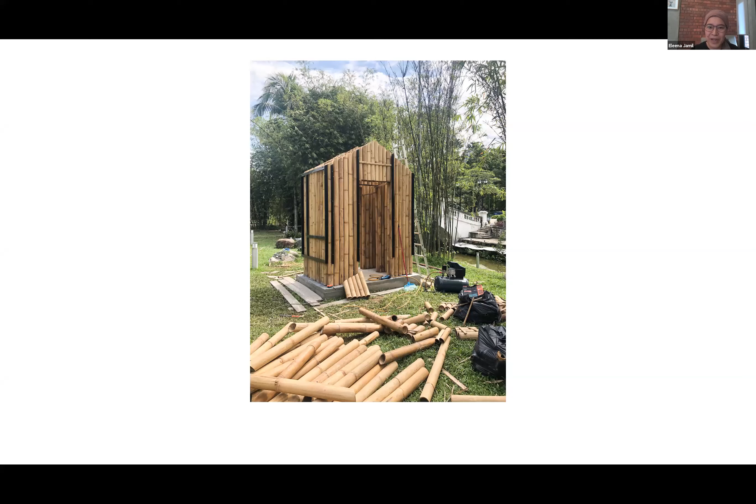Bamboo is a building material that is grown by nature. There is no other building material in the world where you could just harvest it, treat it, and use it immediately as a building material. Therefore, it is a great sustainable material, as the embodied energy is low, especially if you use it locally. Materials like timber, steel, and concrete consume a lot of energy in their production process to make them usable as a construction material, but not bamboo.

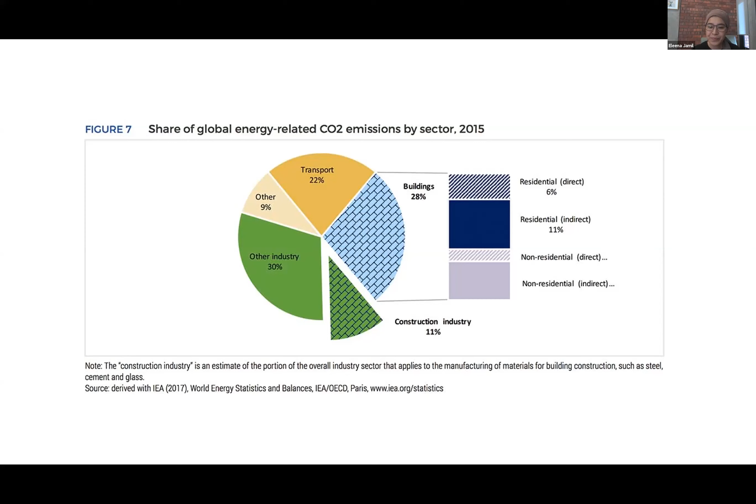This is important because the construction industry forms one of the largest consumers of resources and energy, and has also been recognized as being responsible for a huge proportion of waste and CO2 emissions. For example, buildings and construction now account for 39% of energy-related carbon emissions, 28% coming from buildings and 11% coming from the construction industry. So the impact of what we do as architects, developers, and contractors on carbon emissions is really huge.

What's happening now is that the extreme climate change we are experiencing means there is a need to shift in the way we build our environment. I believe that using more renewable and biodegradable resources like bamboo will really help in reducing emissions and lessening the production of waste we are experiencing right now. So as an architect, I feel that bamboo offers architects and designers the opportunity to build more sustainably, as part of our civic duty to overcome the effects of global warming and excessive waste.

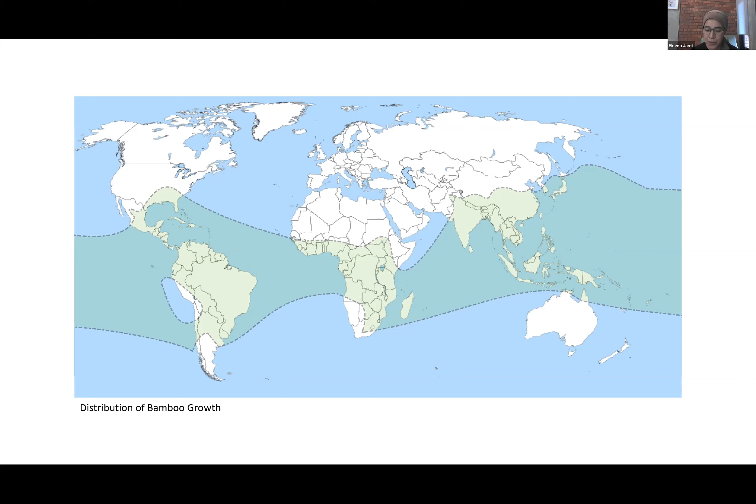Bamboo thrives in many parts of the world, so there is no shortage of the material or of places to cultivate it. For example, you get Guadua angustifolia, which thrives in South America. In Southeast Asia, you get Dendrocalamus asper and Bambusa blumeana, very, very strong bamboo. And in China, you get Moso bamboo.

So bamboo, like most natural material, is highly biodegradable. Working with bamboo means working within the limits of nature, in the capacity of Earth's ecosystems and the ability to produce natural resources. They form a renewable resource and are harmless when they are disposed of, disintegrating over time.

Bamboo has the ability to sequester large amounts of carbon, especially in a well-managed plantation where harvesting is done properly and regularly. Bamboo plantations are actually easy to manage because it grows very quickly compared to timber. It's self-replenishing, so new plantings are not required after harvest because the root systems are still intact.

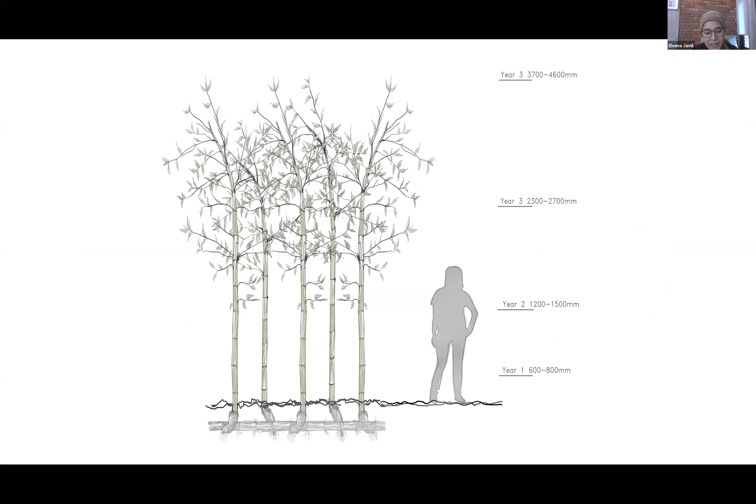The other important thing about bamboo is that it grows remarkably quickly. It grows to full mass within 6 months, and it's suitable for structural use within 3 to 5 years. Compare that to hardwood trees, which take around 30 to 50 years or even longer until harvest time. So investing in bamboo for building materials involves a much smaller period of return on investment compared to timber.

Bamboo is also the ideal material in this concept of circular economy. So what is circular economy? It asks us to consider the entire life cycle of everything we produce, from cradle to grave, or from cradle to cradle. Here on your screen is the circular economy diagram.

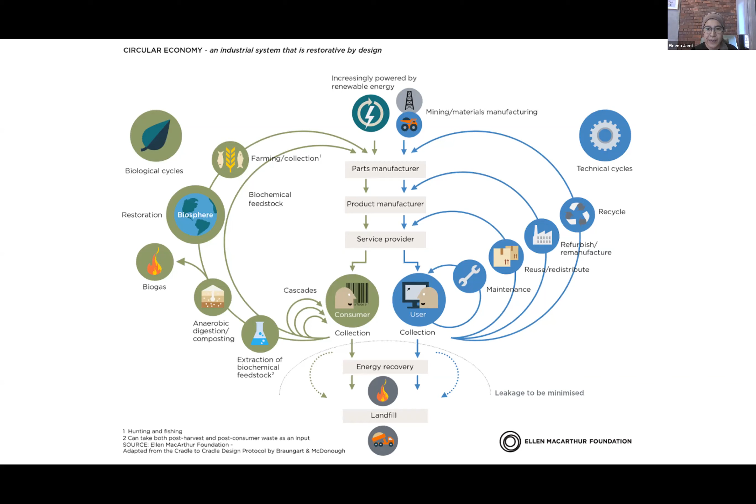On the left-hand side, you get products which are 100% renewable, biodegradable after use. They can be either recycled or regrown by nature itself. On the right-hand side, you get non-renewable industrial material whose finite stocks need to be secured by high-level recycling. So bamboo would work in this left-hand side circular economy diagram perfectly.

Bamboo is often called the green steel for its remarkable strength. The benefits of using bamboo in construction extends to the fact that it has high tensile strength, which is parallel to the fibers that run longitudinally along its length, compared to most soft and hardwoods.

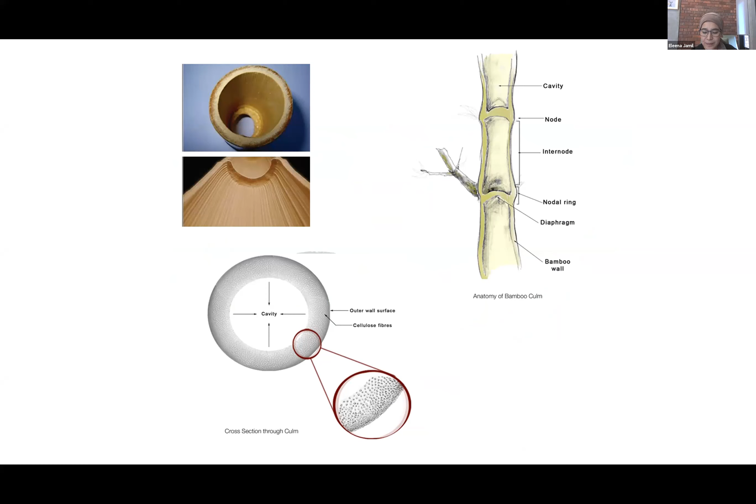It's a very efficient building material because of its hollowness. This means that it's lightweight and has high levels of stiffness based on its strength to weight ratio. So what you get when building with bamboo is lightweight construction, which reduces perhaps the loads on foundations.

But bamboo has its problems, and one of the greatest concerns about using bamboo among many people is its durability. Being a natural material, it will decay. It's biodegradable, and it is susceptible to insect attacks.

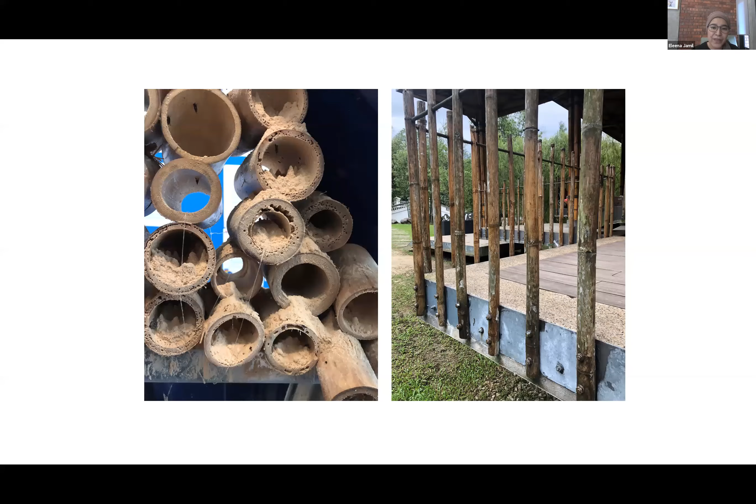In the image on the left here, you see an infestation by powder post beetle, and on the right is a fungus attack. But there are ways to overcome this by treating bamboo, either naturally using traditional methods or chemical methods.

The object of treating bamboo is to remove the starch in the bamboo. The starch is attractive to insects, so bamboo with a high starch content would be very attractive to insects.

With traditional methods, you get various approaches. For example, after harvesting, you just leave it in a river, soaking it in running water. Sometimes you could actually tie them up to make rafts so they can be transported to a place where they are required. By the time these bamboo rafts arrive at their destination, the starch would have leached into the water.

And there are also other traditional methods, such as steeping, which is just leaving bamboo out to dry vertically, and smoking is also another good traditional method.

Chemical methods, of course, use chemicals to treat timber. In Malaysia, we use a lot of the open tank method, where there are big tanks, either in concrete or steel, where bamboo is immersed in a chemical solution, usually a boron and borax mixture, for up to 3 days or sometimes a week.

Or you can just put it vertically in a drum with the steeping solution. And there's this more effective method, the modified Boucherie method, where pressure is used to push the chemical into the bamboo capillaries so that the starch comes out on the other end.

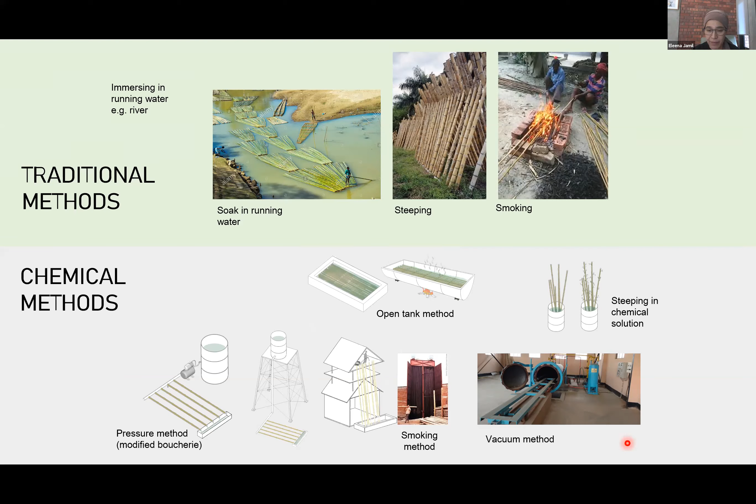In Japan, you find the smoking method, where large kilns are built to smoke bamboo. And then there's the vacuum method, which is used for treating timber and can also be used to treat bamboo.

Natural material like bamboo has always been used to build the environment in the form of vernacular structures in communities where the plant thrives, obviously. But we have lost that way of building. This is because of the Industrial Revolution in the 18th and 19th century, which brought a shift from using renewable building materials to non-renewable materials that are mined, such as iron to make steel, or sand to make glass. So climate change and its devastating effects, and the problem of waste, has led us to think about a more natural way of building.

I think there is a lot to learn from these vernacular structures based on a simple principle: they work and look the way they do because they are built for the climate and site conditions, using what is available around them, designed for the culture and the everyday life of the people living in them. It's the same principle that could enrich contemporary architecture without having to compromise modern aesthetics and technology.

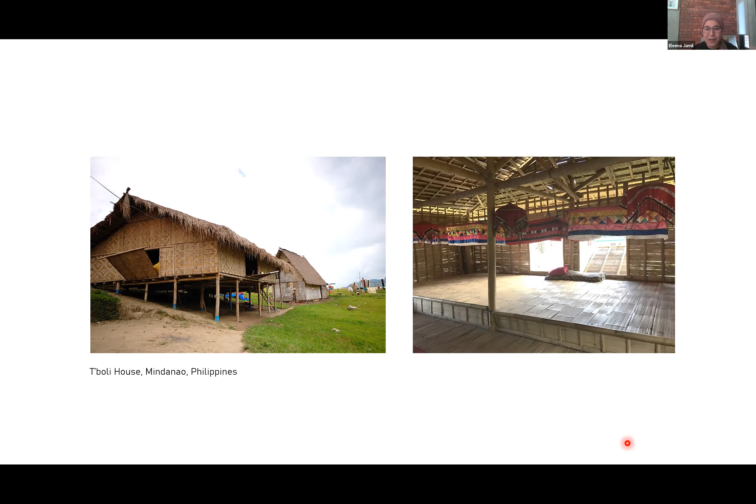So stilt houses are still being built, mainly in rural areas. Here we have the Bahay Kubo, or the Nipa hut, in the Philippines. This particular one is built by the T'boli indigenous tribe in Mindanao, Philippines, where the columns, beams, rafters, walls, and floors are made entirely out of bamboo. They are mainly single volume houses capable of accommodating up to 16 people at a time. I find the window detailing especially interesting, where it's hinged at the bottom, so when the window opening shutter opens up, it becomes a shelf during the day.

Then there are these bamboo houses by the Mru people in the Chittagong Hill Tracts in Bangladesh, which are still around today. The main columns and beams of this house are actually made from timber with their bark removed, while the secondary supporting structures are bamboo. Below the floor deck level, as you can see in the section of the Mru house, props are used which help improve the stability on sloping ground and counteract the lateral sliding that may be caused by mild earthquakes in this region.

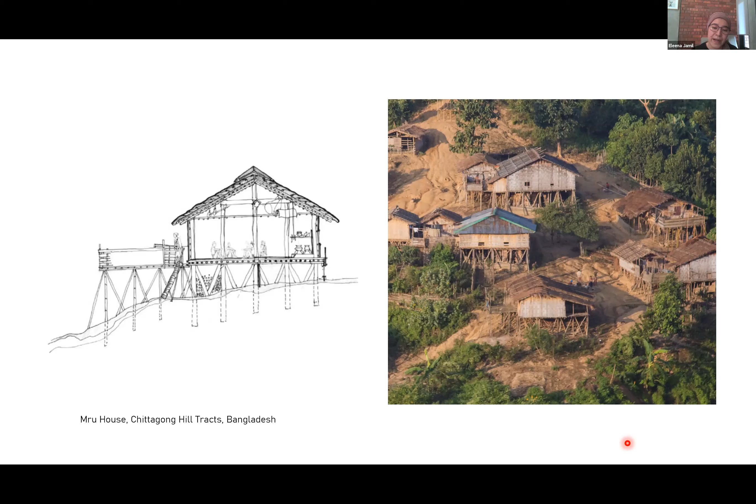So they've been proven to be quite durable during earthquakes in the way that they are designed. The walls of the Mru house are mat-like, woven from bamboo strips 200 mm wide by 50 mm wide. You see the wider strips on the image on the left-hand side; the wider strips are vertical, and this makes sense because it is more effective in expelling rainwater from the surface, keeping it dry. The floor as well, as you can see, is a woven bamboo mat.

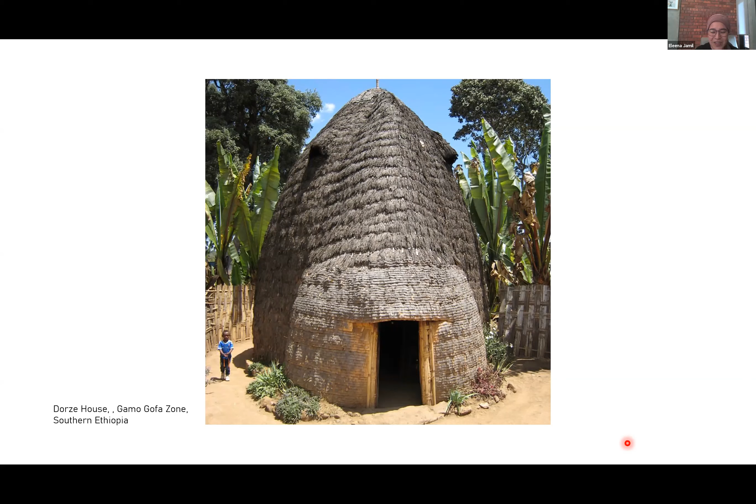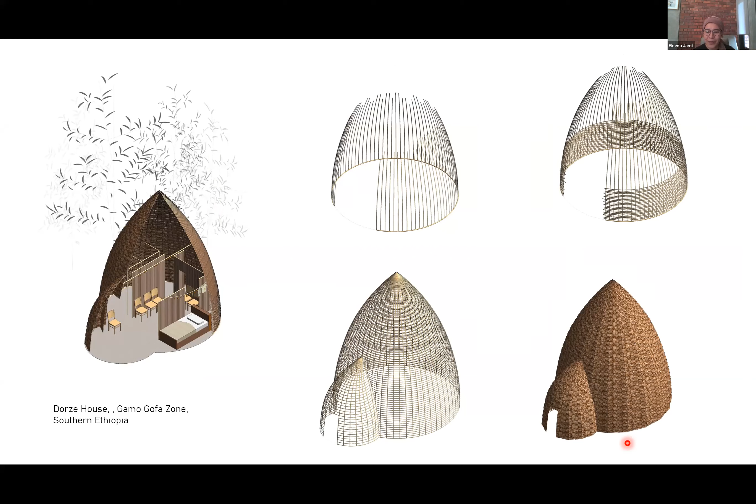So the Dorze house is actually woven like fabric. It consists of bamboo strips with their softer inner lining removed so that they are able to be woven around, like the images shown here, woven to become this interesting conical shape.

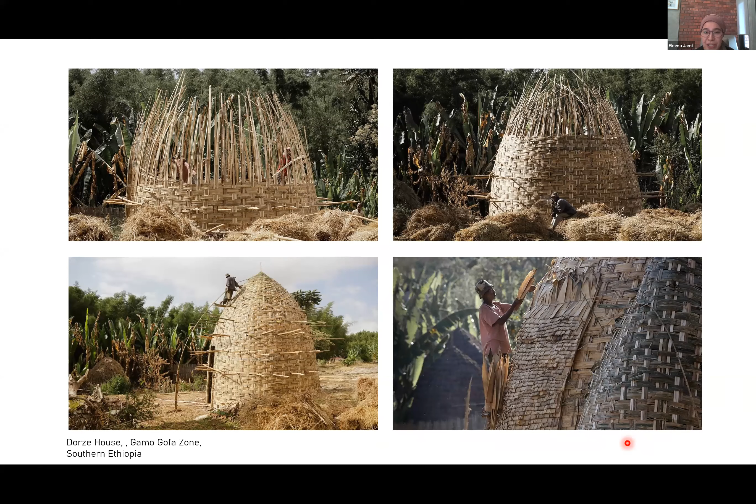To waterproof this house - as you know, bamboo doesn't last very long when exposed to sun and rain - there's an interesting solution. The final layer is a thatch made from bamboo sheaths, which are the protective leaves that protect the nodes of the bamboo culms as they develop. They are a dry, light, leafy material, which are taken off and arranged like a thatch, as you can see in the image on the right, to protect the Dorze house. Research shows that this house, if maintained and built well, can last 40 to 50 years.

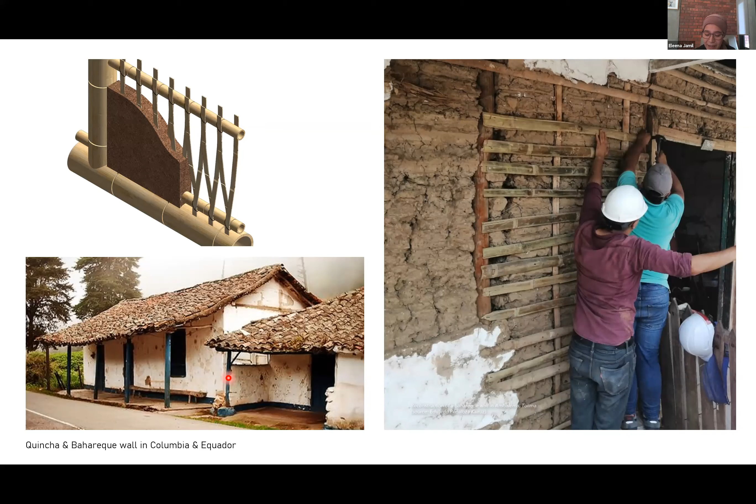Another interesting vernacular bamboo technology is this wattle and daub wall construction. This technique is commonly found in Central America and South America, locally known as the Bahareque or the Quincha system. It's widely used with Guadua angustifolia, because Guadua bamboo grows very well in this part of the world. It consists of a woven frame of bamboo strips, which is then plastered, usually with a mixture of mud and horse dung, though later it changed mainly to clay or concrete. Properly built and frequently maintained, the Bahareque has good structural properties that can resist damage from earthquakes experienced in this part of the world.

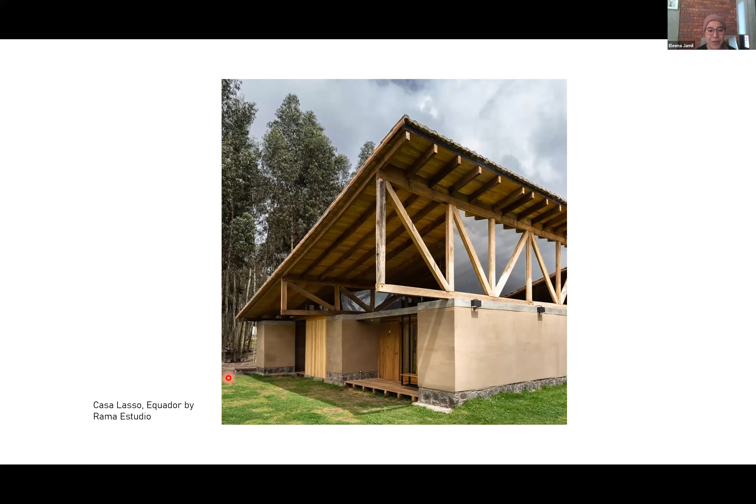So the Bahareque has been used in contemporary architecture. This is a house with a wattle and daub modern construction in a project by Rama Estudio in Ecuador called the Casa Lasso.

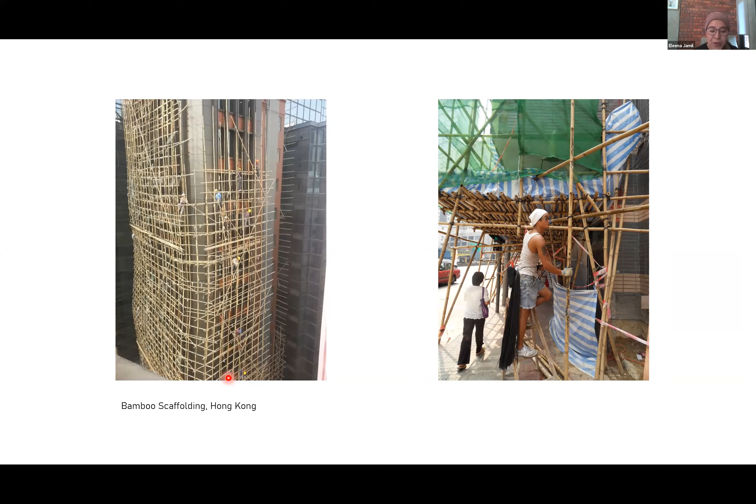Another important vernacular tradition is bamboo scaffolding, which I'm sure everyone has seen in Hong Kong and South China. It goes back hundreds of years, initially used for temporary Cantonese opera theatres and worshipping halls, but now used to create high-rise towers. The scaffolding system is very simple, but makes sense and is easy to create.

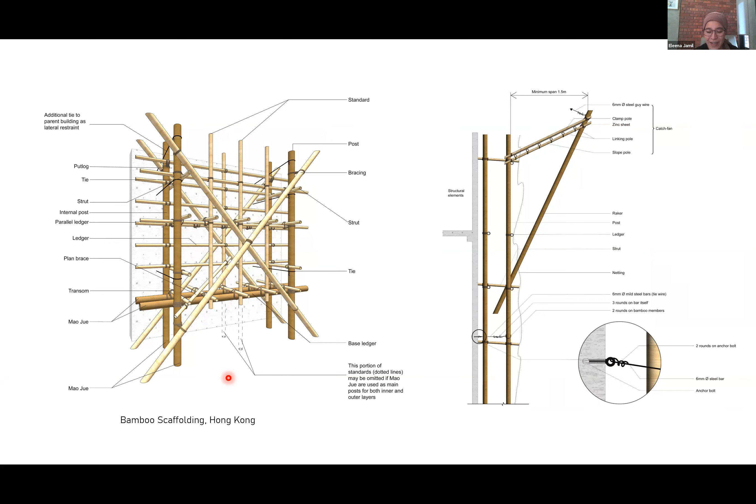It effectively uses ties and anchors to create three-dimensional climbing structures, using local bamboo called Kao Jue and Mao Jue. The Mao Jue is the famous moso bamboo that is grown quite a lot in China and Taiwan.

The most bamboo buildings being built today use vernacular-based methods of construction and jointing. This traditional method usually involves making unique cuts to increase contact surfaces between the culms, and lashings are often used to keep them together. The rigidity of this traditional joint relies heavily on the friction between culms, between lashings and the culms, and the tightness of the lashings.

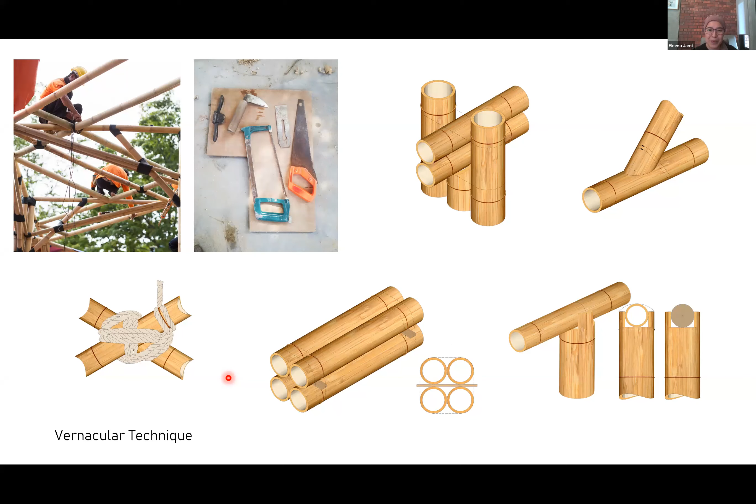This approach produces some of the most elegant connection details and beautiful bamboo buildings, but they are labor intensive and rely heavily on a worker's skill. Nevertheless, it's an important technique to understand in order to develop more modern methods of jointing bamboo.

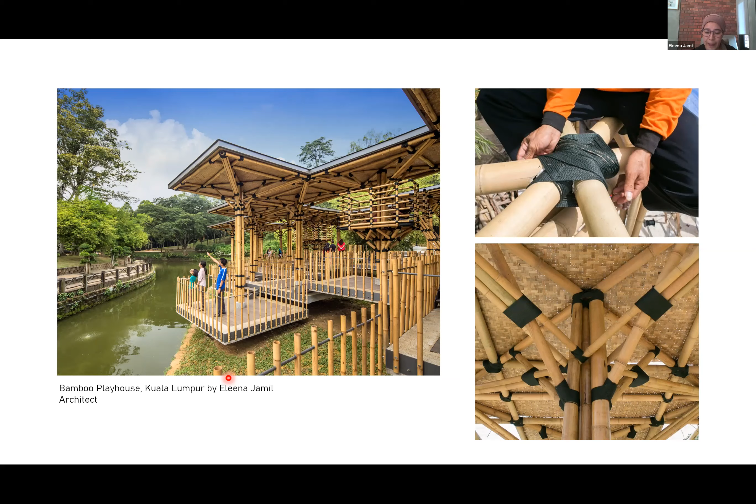We've done a few bamboo projects, mainly built using this traditional jointing method. As you can see in these images, they are cut and fit together, then lashed using strings, and we've also applied resin to the strings so that they don't unravel.

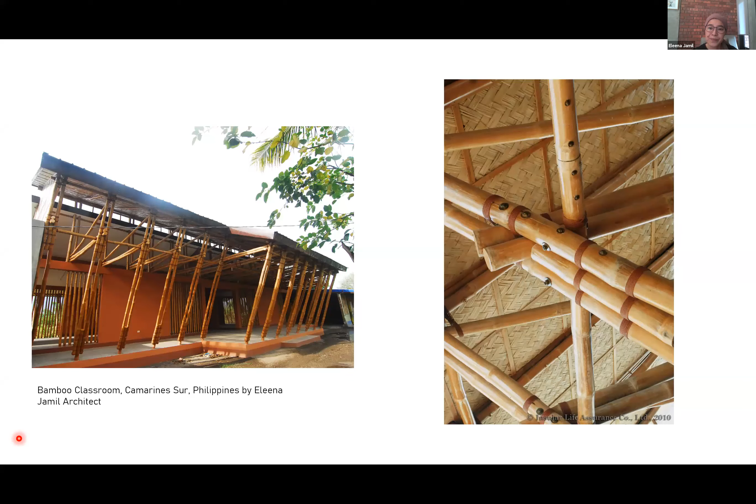Another project of ours is the bamboo classroom in Camarines Sur, Philippines. Again it uses a traditional jointing method, but here we've added nuts and bolts, because this is a wind resilient structure that needs a high degree of rigidity to resist the wind. It's a hybrid between a traditional technique and an intervention involving modern materials.

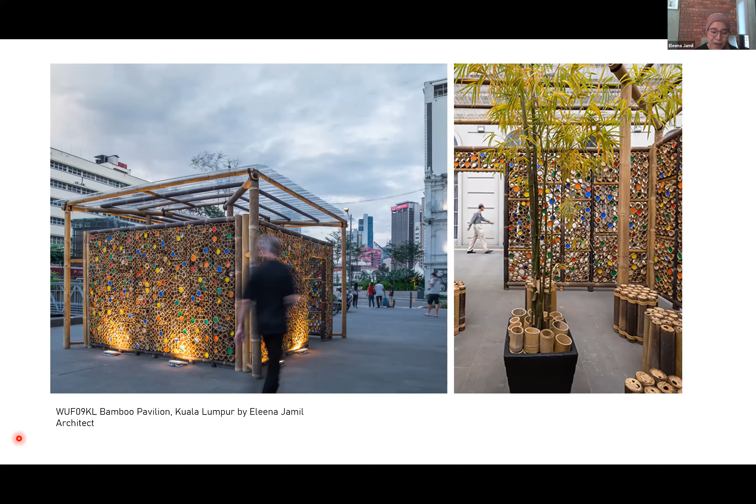You can actually create very modern and contemporary structures using traditional technique. Here, simple lashings are used to put together a pavilion we created for the World Urban Forum in 2018, with simple bamboo rings, some inserted with colors. This was designed for UN Habitat, so the colors reflect the sustainable development goal colors - using a very simple connection technique.

This is another interesting project in the way it is made - the Forest Pavilion by NArchitects, based in Brooklyn, but the building is in Taiwan. This diaphanous curving structure is built using 20mm diameter local bamboo that grows quite a lot in Taiwan - the Makino or Phyllostachys makinoi bamboo.

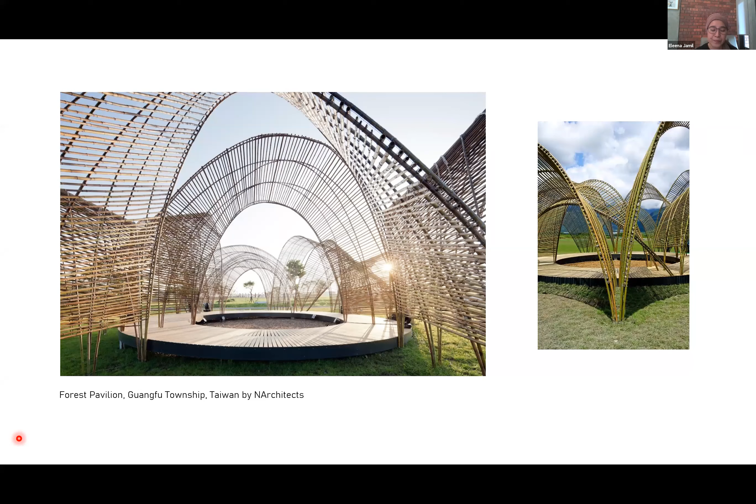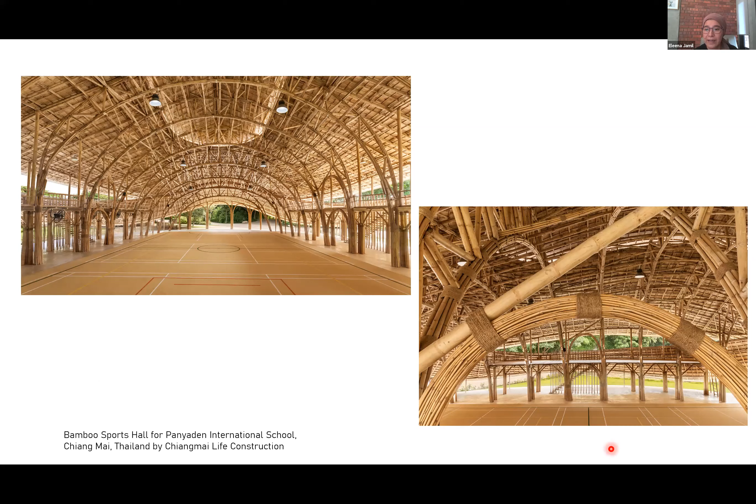Using vernacular methods of construction is capable of producing some of the most amazing bamboo architecture. This is the bamboo sports hall for the Panyaden International School in Chiang Mai by Chiangmai Life Construction, and you can see in the image the traditional techniques used to put it together.

Traditional methods of jointing round bamboo culms involving friction, tight lashings, and pin and socket connections remain a vernacular practice. It is craft-based, custom-made, with the quality and strength of connection dependent largely on the skill and workmanship of the worker rather than precise mechanical calculations. It works remarkably well in small projects or one-off buildings, but applying such practice to large developments can be impractical.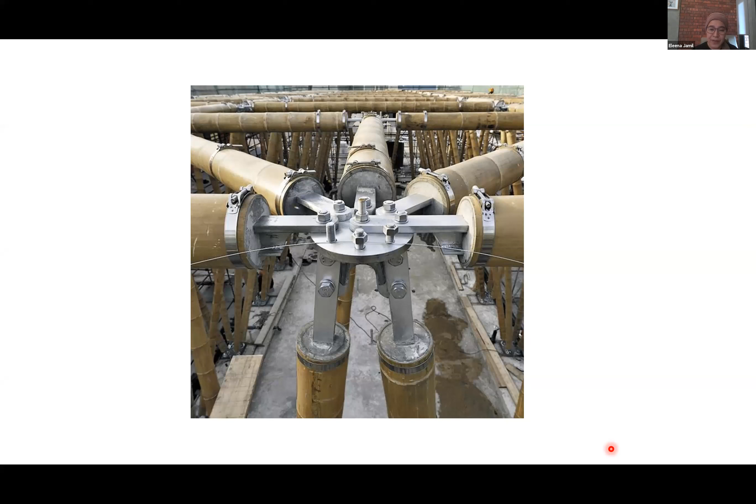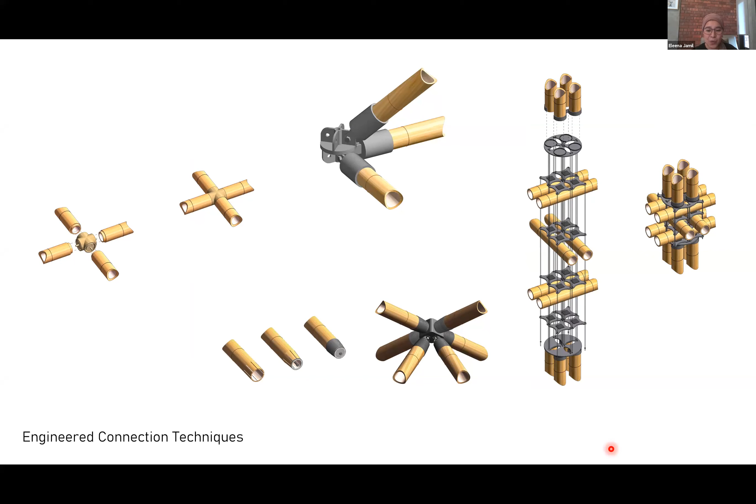For bamboo to be used as a modern building material, it needs to be modernized, industrialized, so that it will allow flexibility, easy and quick assembly, in addition to prefabrication and modularization. There are many examples, lots of research being done on modern connections using different materials such as timber, PVC, metal, sometimes resin. These techniques allow for connecting bamboo in different directions and for grouping bamboos together to become columns and beams. So it's not impossible. A lot of research has been done.

One of the most amazing, perhaps one of the most beautifully detailed industrialized bamboo building methods, is the energy efficient bamboo house by Studio Cardenas. It's developed using dry connections. Here, what they've done is tried to avoid perforating through the bamboo or infilling the bamboo with concrete. Instead, there are lightweight aluminum plates that sandwich or clamp the bamboo together, tightened by nuts and bolts that run through the plates. So the structural integrity of the bamboo is not compromised by drilling, which happens quite a lot in traditional bamboo construction.

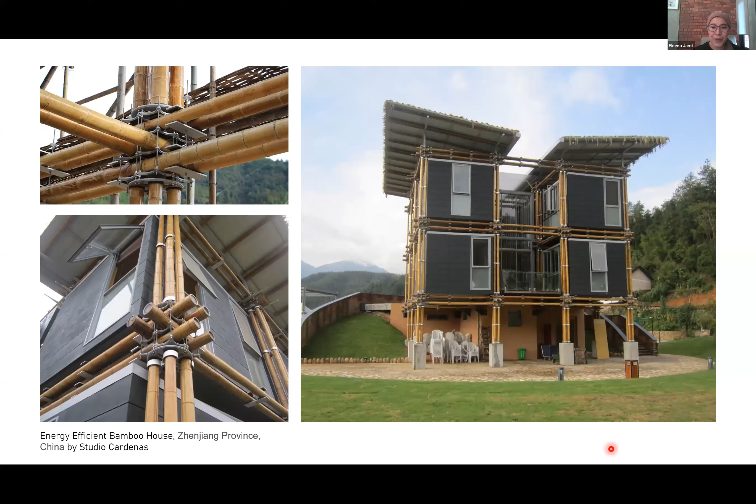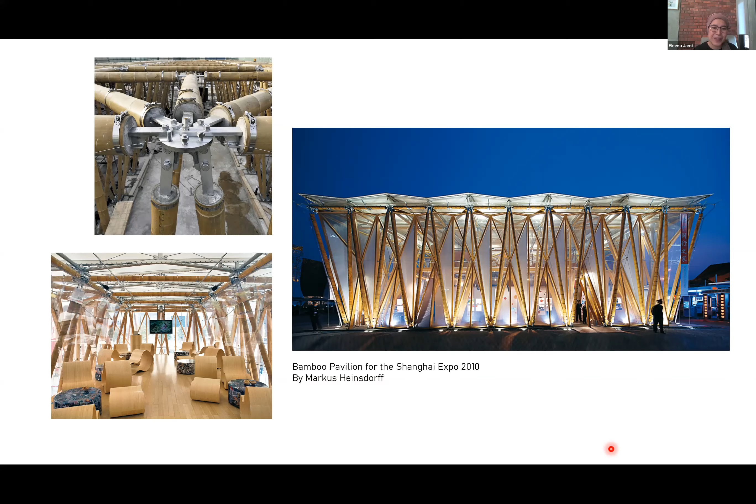This is in China, by the way. Another more high-tech version uses mortar to infill the ends of the bamboo culms, where they've set in a steel connector piece at the end. The steel connector that protrudes out of the bamboo is able to be connected in many different ways. This solves the problem of non-uniformity between the culm dimensions, making the ends of bamboo culms uniform. So this is another interesting development in industrialized modern bamboo construction.

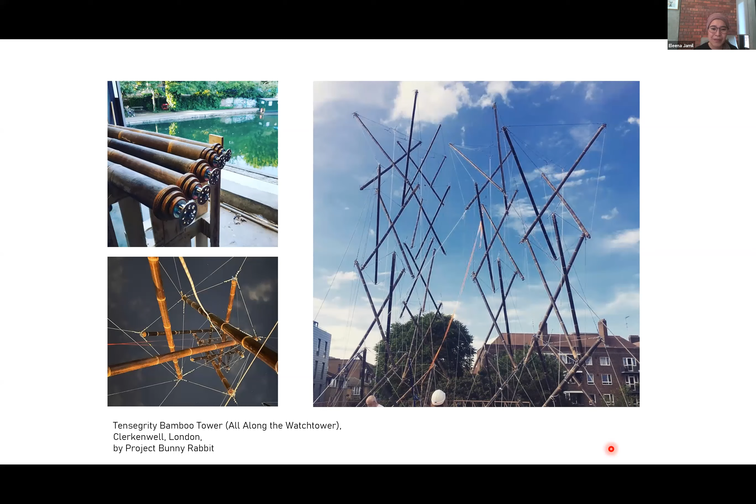Here's a very recent tensegrity structure by Project Bunny Rabbit in London, where they've developed a special end cap detail allowing steel wires to be threaded through. This allows the columns to be hoisted up in the air in a fashion that seems to defy gravity. So again, this is another end cap detail that could be developed for your competition project.

As I've said before in this lecture, for bamboo to be used as a modern building material in mass developments, for example like housing, it needs to be modernized, industrialized, as it would allow for flexibility, easy and quick assembly of structures, and also prefabrication and modularization. My office is currently looking at developing connection details for a proposed bamboo terrace home.

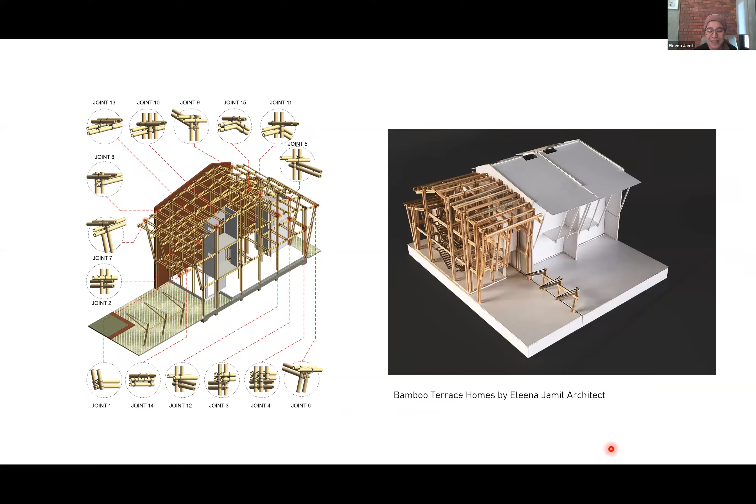This is a self-initiated project which allows bamboo culms to be connected quickly and easily on-site or off-site. It's based on a system that has been used in scaffolding. So what we're aiming at is to come up with housing that uses bamboo that will appeal to almost everyone, to bring the idea of bamboo house or bamboo building beyond resorts or rural developments.

To achieve this, bamboo needs to be seen as a standard modern building material that could easily be obtained in the market, and it passes all the building codes. I'll not talk about building codes today, but currently it's not really acceptable to build structurally out of bamboo in terms of local authority approvals.

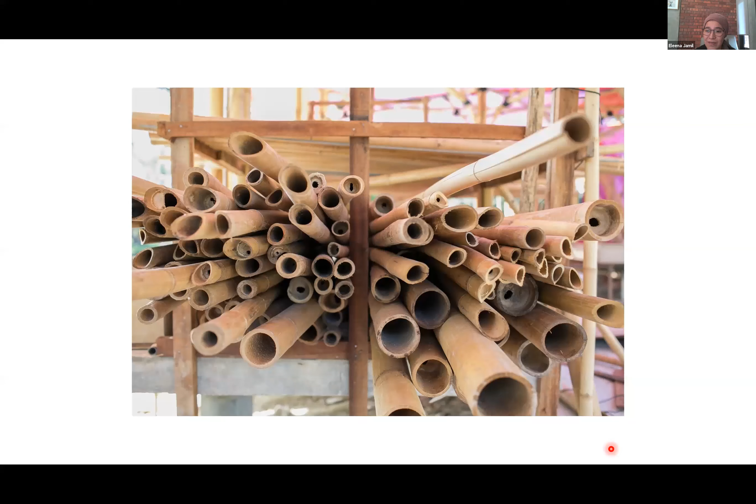One of the reasons that stops bamboo culms from being successful as a building material is dimensional instability. You would not find two bamboo culms that are exactly the same size. They are not perfect circles as well. They are always bent; it's very hard to find bamboo that is very straight. And they're also conical, meaning they are bigger at the bottom and smaller at the top. This makes using bamboo for building construction very difficult.

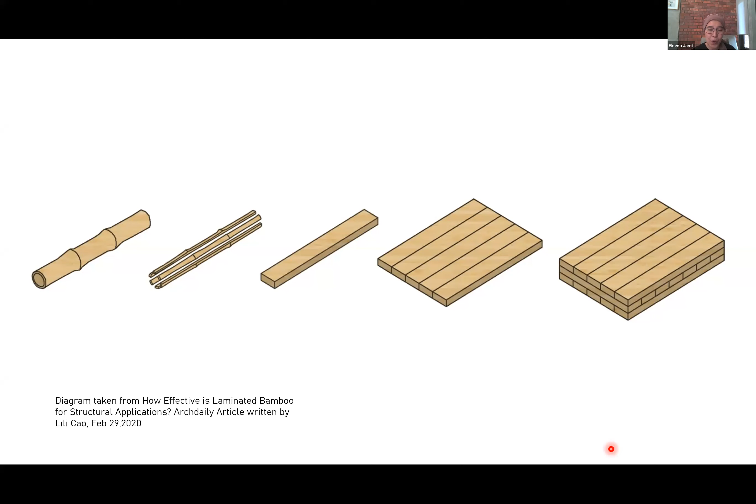To overcome this, there are remarkable developments, particularly in China, producing engineered bamboo sections, sometimes known as LBLs, which stands for laminated bamboo lumber. They look very much like timber; in fact, they have lost their bamboo look, but they are capable of acting as structure, as cladding, and also as flooring and many other uses you would expect from timber. However, the energy required to turn them into something easy and familiar to use may or may not compromise their sustainability credentials, which is why I'm leaning more towards whole bamboo culms in architecture and building construction.

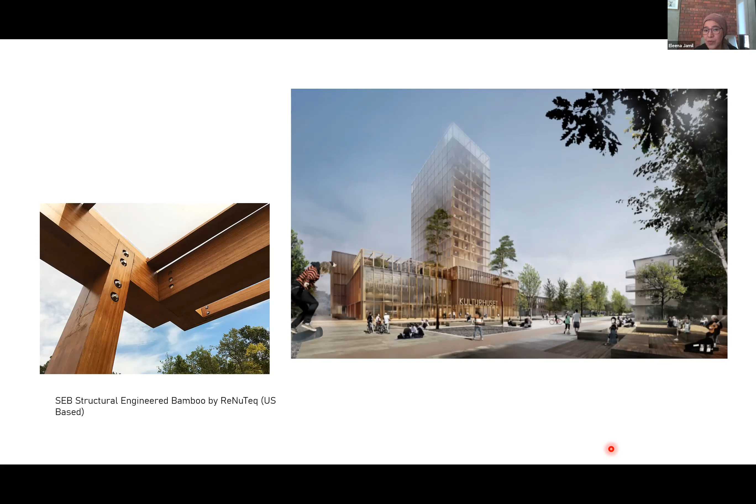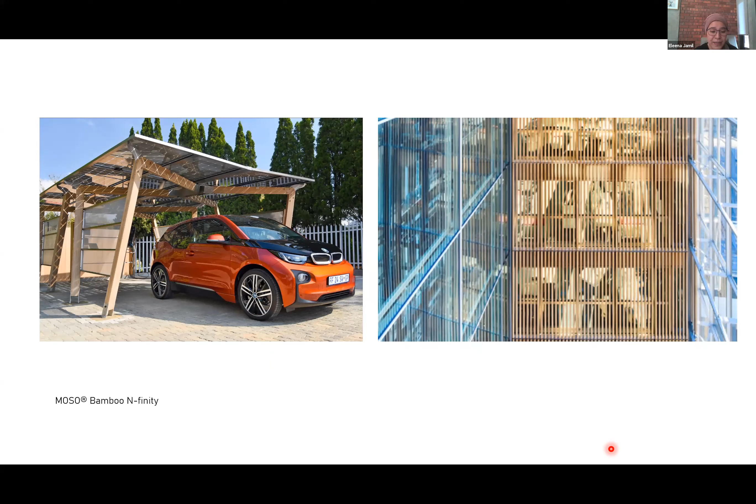There are many companies developing these bamboo laminates. One of them is ReNuTeq in the US, which uses South American guadua bamboo to make structural engineered bamboo, which they claim can be used to build high-rise bamboo buildings. Of course, there is MOSO bamboo, a famous company that produces a range called Bamboo N-finity that could be used structurally. Here you see it being used to build a little shed and also as cladding inside an office.

So this is the end of my lecture. It's a bit short, but as an end note, I would like to say that bamboo in whatever form is a very sustainable material. But to make it truly sustainable, we need to be careful about the embodied carbon in their making, meaning the energy and carbon emissions required in their planting, harvesting, and transporting needs to be considered. Also, we need to be careful of the impact to the environment, for example the leaching of chemicals into our environment and water, and also problems of deforestation. So to make it truly sustainable, we need to consider all these things to have a significant influence on their true sustainable value. But saying all that, bamboo remains a much more sustainable material compared to others like concrete, steel, and glass.